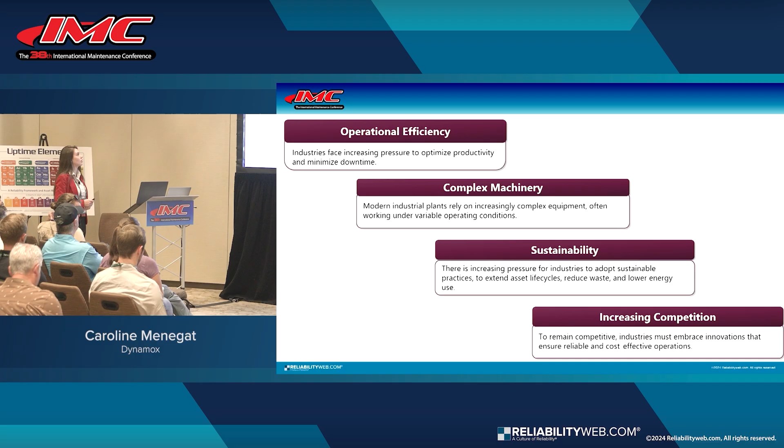At this point, I don't think anyone still has to be convinced about condition monitoring, but just some highlights on why it's such a hot topic these days. Operational efficiency - there is definitely a pressure to increase productivity and reduce downtime. So that's definitely the top reason.

Also, complex machinery. It's normal for me to visit plants where old machines for a specific operation would need 3-4 machines, and now it's all being replaced by one machine that does it all. Of course, it gets more complex - variable speed, variable operation. So that's another thing to highlight here.

Also, sustainability. There is definitely good pressure to actually increase the life cycle of assets, to reduce waste, to have lower energy consumption. So that all adds to the table as well.

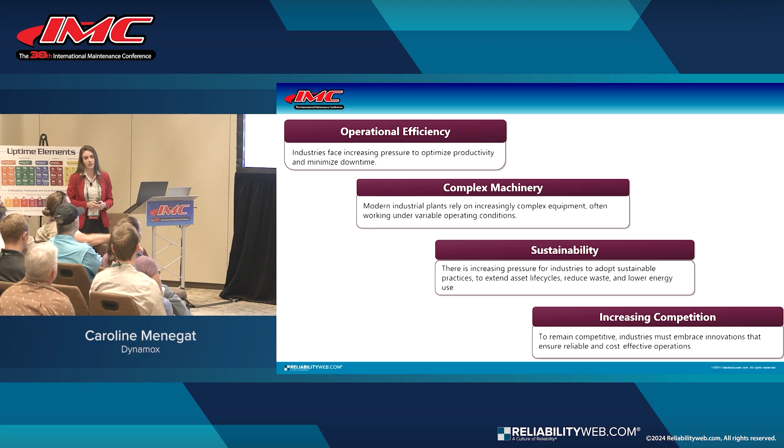And definitely increasing competition - we're seeing this all over, it's full of competitors here, from Dynamox, for example, the company I work for. So everyone is welcome, but it's definitely increased competition in this market. And the industries that don't embrace innovation are definitely going to stay behind. So that's another reason I'd like to highlight here.

And what I mean by condition monitoring - I attended a few other conferences here, a few other sessions, and saw a lot of people talking about vibration. I just would like to highlight that I don't believe it's all vibration. It's definitely one of the most important metrics that can be monitored, but there's a lot more than that.

When we think here, the first part is all about power generation - providing energy for the rotating equipment to work. So we divide it into this, and here we list that it's, again, not all about vibration. There's definitely electrical analysis that can be performed, oil and temperature that can be performed throughout this whole chain. So there are a lot more variables to monitor here, and we'll be covering this a little bit more.

The reason why I put this together is to have a broader spectrum, not to just focus on one single thing. I'm not saying here that we should be monitoring these variables for all the assets we have in an entire plant - that would be very expensive, and we would have so much data that we wouldn't even know what to do with it. But that's why we should prioritize.

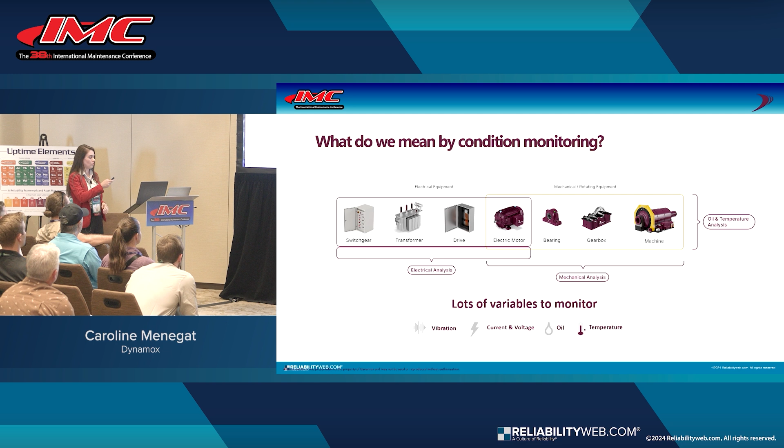We solved the problem in terms of vibration. They even changed the lubrication plan they had based on vibration. But then, so we got rid of that, and the current and voltage of the electrical motors started to be the headache now, because electrically there was no monitoring. So that's why you should really get to the root causes and then decide what to monitor, what to prioritize.

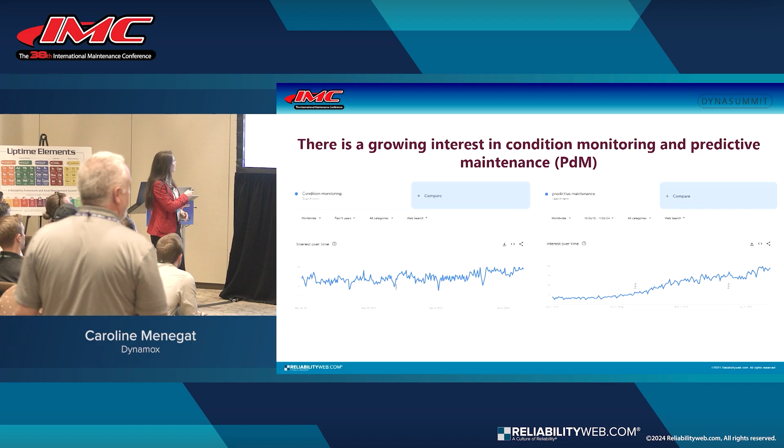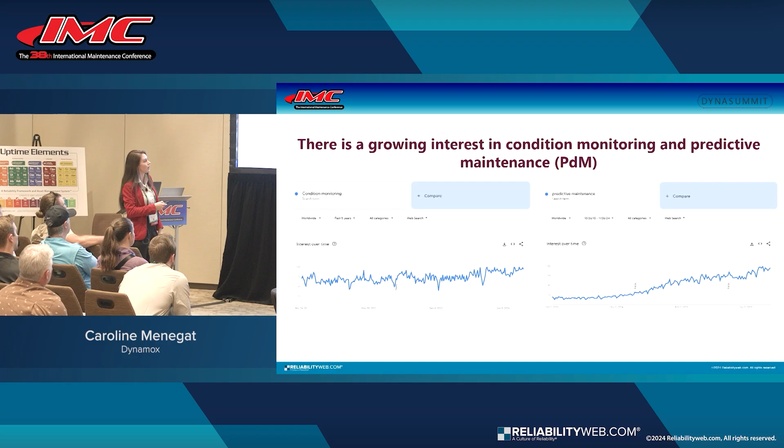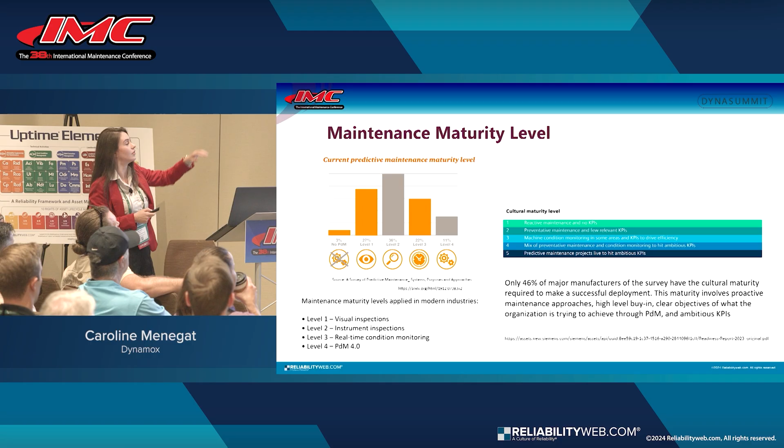But yeah, there is still a long path to go. We've been talking and discussing this, but here there are some other researchers I brought to discuss, and there are a bunch in the market, so this is just one of them. Here is the source, and basically here are the levels. They categorize different companies they searched in levels of maturity. Level 3 means real-time condition monitoring, so they're doing condition monitoring already. And PDM, doing something about it or being predictive, only 11% here. So that's still a long path to go.

Another study here brings the cultural maturity. I'm not even talking about already implementing. I'm talking about being ready to implement or to have a predictive program, where only 46% of the researchers here consider that they have the requirements to successfully implement a predictive program. So that tells us a lot about the long path we still have to go.

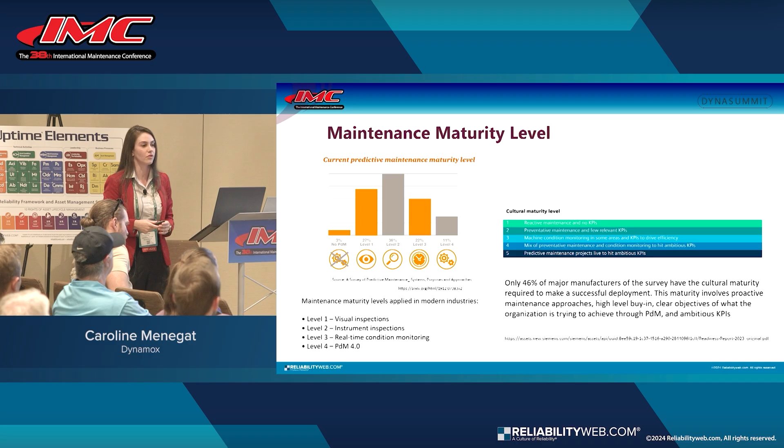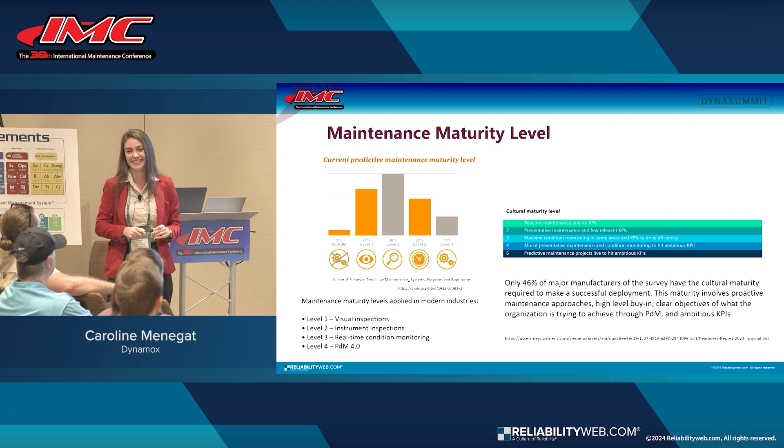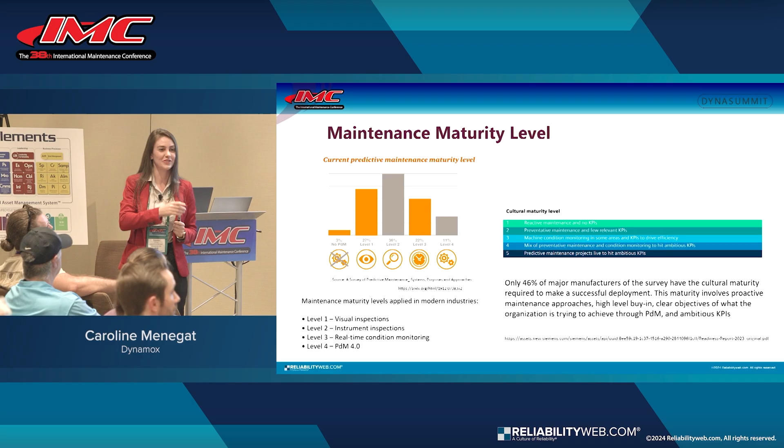I don't know if anyone here would categorize their companies in this level. Anyone care to share if they have a predictive program already in place, successfully implemented? Anyone here? Nobody yet? Nobody's part of this 11%? What about condition monitoring? Are you guys doing some condition monitoring, maybe still structuring the predictive program? Anyone care to share a little bit? I think the microphone. Here you go.

At Hill Air Force Base, we've had a full-blown predictive program that's been widespread since, I want to say 2014. Oh, wow. What's held us back has been manpower. They want us to do everything from oil analysis to ultrasound, and they've now added other locations, and we're down to 3 people. So, oh wow. We're doing our best, but it's there. It's just we can't be everywhere at once.

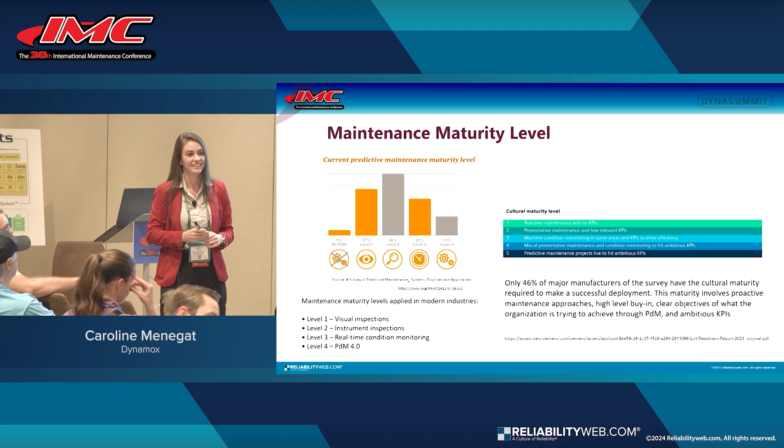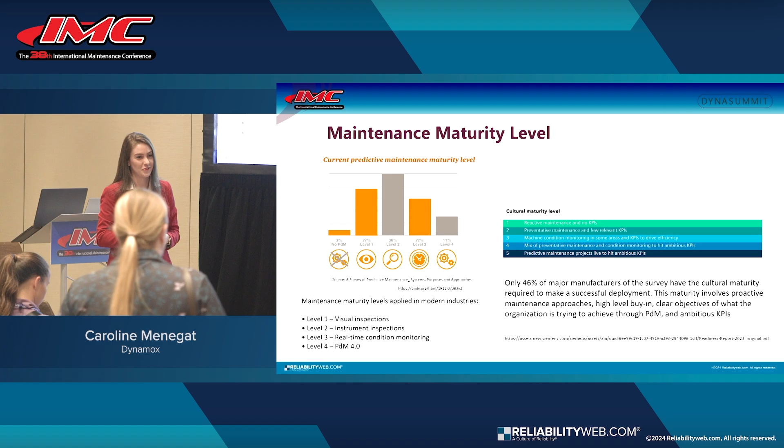Yes, I attended yesterday, I think it was from NICARE, and they were sharing this lack of skilled people. So that's definitely a problem. Everyone is facing the same trouble. I will discuss a little bit how we can help on this, not saying your specific case, I think with 3 people, down to 3 people, there's not much that can be done other than hiring. But there is definitely room to optimize their work. So I'll be discussing this a little bit more.

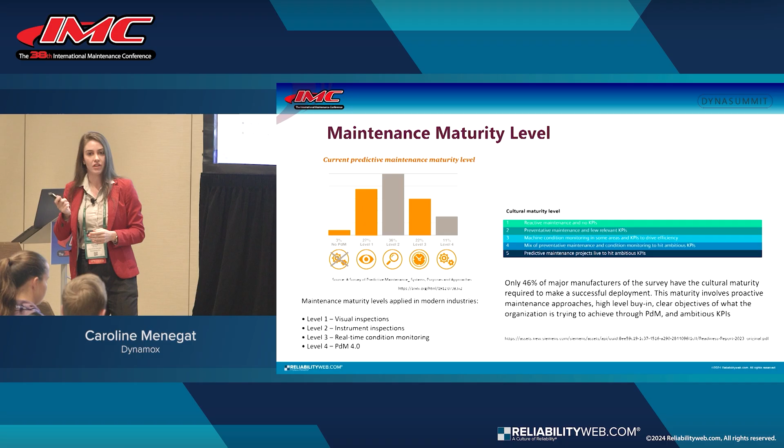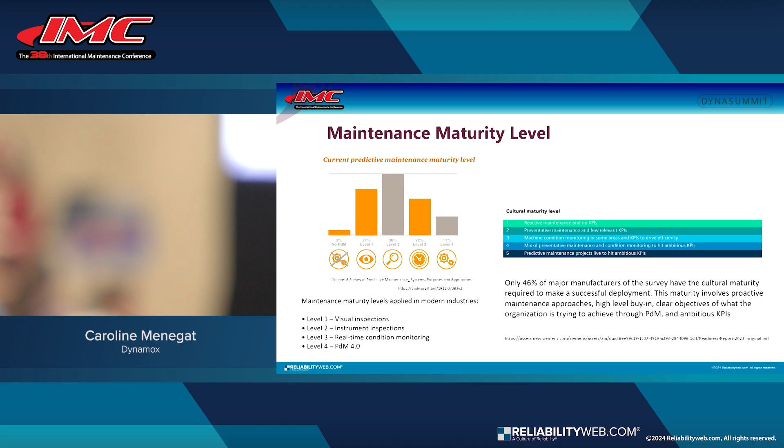Anyone else would like to share their programs or the condition monitoring, what they're doing, if it's been successful or not? No? I'll move forward then. You guys are shy today. Well, guys, let me move forward here.

So I do believe that technology can help on lack of people, help on getting things safer. That's definitely one of the main reasons why technology should be applied. And here, one that I would like to highlight in terms of collecting data, or one of the reasons that we should be moving to continuous condition monitoring, is hard to access or high risk measurement locations.

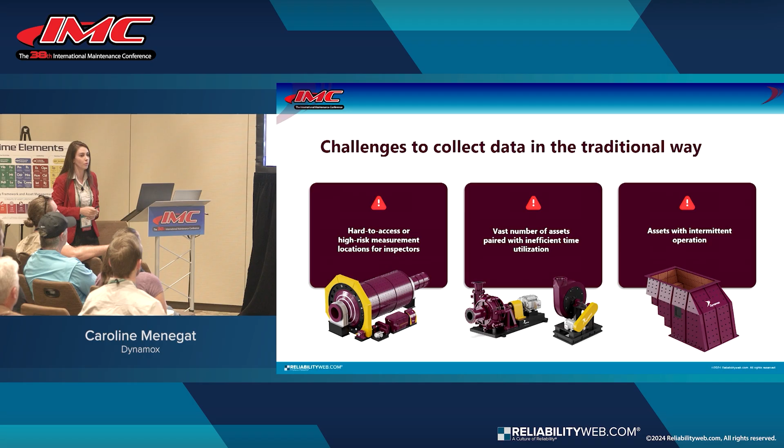So if you can automate this and bring technology to help on this, it would definitely help on the lack of skilled people. And also here, one thing is that if this person is... I'm not gonna be in the fight of wired or wireless.

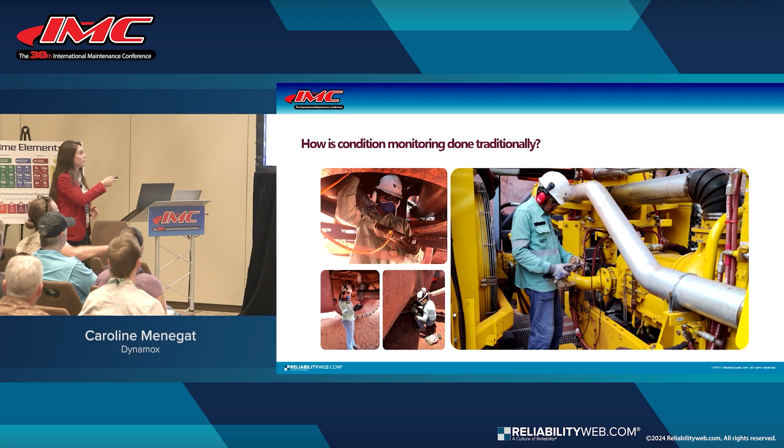To be honest, I don't think we should even be having this discussion because it's just a means. But if the person is spending 70, 80% of her time collecting data and not analyzing it, that's definitely not bringing value to the table. So that's another reason to help.

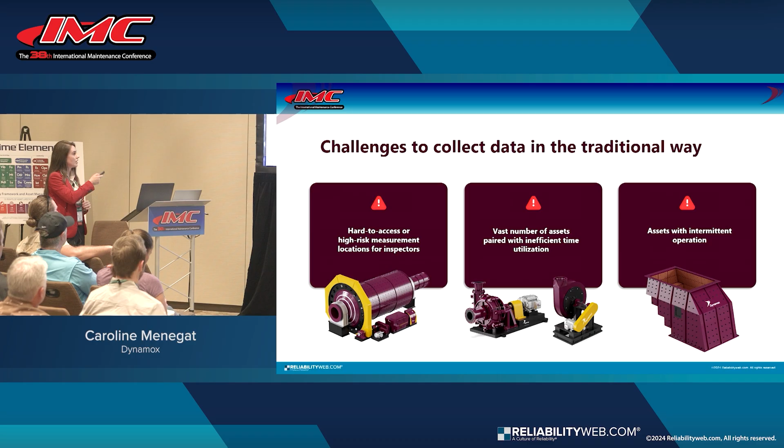And also here, assets with intermittent or variable operation. So there are some events that happen at some point, and then when you go measure it, it's not happening anymore. Having a continuous condition monitor will definitely help on this. And again, it doesn't matter if it's wired or wireless, I don't really care about it. It's just if it's vibration or electrical. But these different operations sometimes need technology to be monitored.

And what else here? Another research that I brought, guys, and again, the links are all here for you to check out. But 5 golden rules to successfully implement predictive maintenance at scale. So they found out that these are the main reasons.

The first one would be to be judicious about which assets to include. We do see a lot of companies starting with pumps or fans, like very easy, or not easy, but they can be very critical, but don't get me wrong, they're not complex assets. So they implement on that, and then when they try to expand, it doesn't work on more complex assets.

Yesterday I was actually watching a session, and the guy next to me said, we started applying vibration sensors in this case, and then when we moved to another plant, we found out it wouldn't work there because of environmental reasons, because the robustness was not present. So I'm not saying it's a bad technology that they chose, I'm just saying you should consider this when choosing, and not go for the easy wins, let's say.

And also, I put it here that the key, I think, is to balance a little bit. We're seeing companies starting with the most complex assets they have. I don't think that's the way either. You gotta have a manageable scope, but with assets that can actually show value when you predict failure. So that's one of the things.

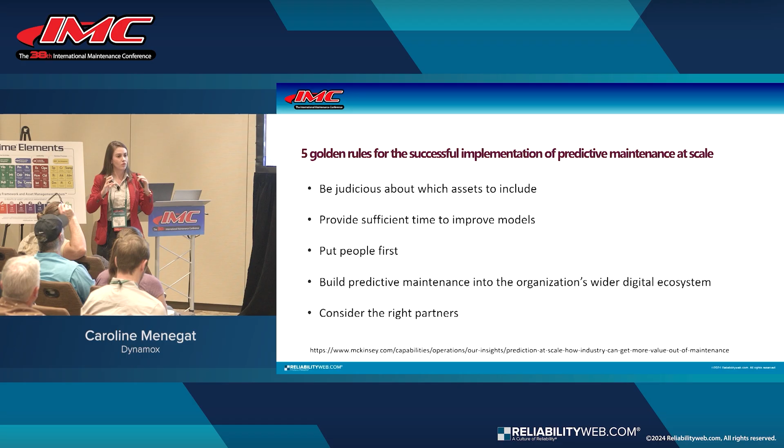Another one listed in this research is build predictive maintenance into the organization's digital ecosystem. So it's very common for us to see a fight between the IT team and the maintenance team. The IT team doesn't understand that the maintenance team is a client of theirs and should be helped. And the maintenance team doesn't understand, for example, data security or this kind of thing. So it's always a fight, and usually they don't work together. So we don't think that this predictive maintenance program should be isolated or should be one side or the other. It has to be all together.

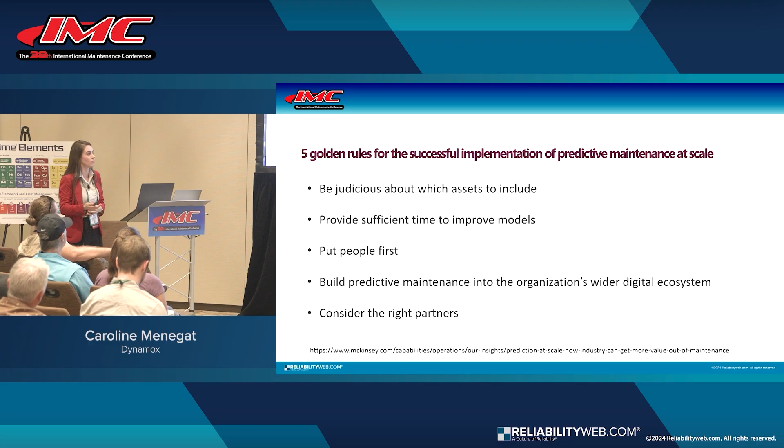And the last one, and I don't want to be commercial here, guys, but consider the right partners. So if you choose a partner or vendor that only sells you technology, I don't think that's the right way to go, okay? Again, not trying to be commercial, but we believe and we've seen that the most successful implementations are when a partner brings expertise and guidance to what you're trying to implement. So that's another thing to consider here.

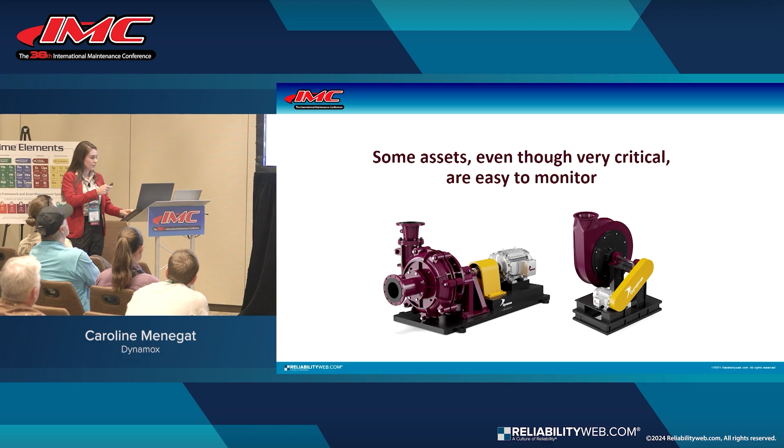And here lies a question about how to monitor entire plants. So if you're not just focusing on fans and pumps, which are easy, how do you monitor entire plants when we're talking, for example, about a mining example. I didn't know, as this is my first IMC, who actually attends, and I didn't see a lot of people from the mining sector, but you can think of this as any other sector, any other plant.

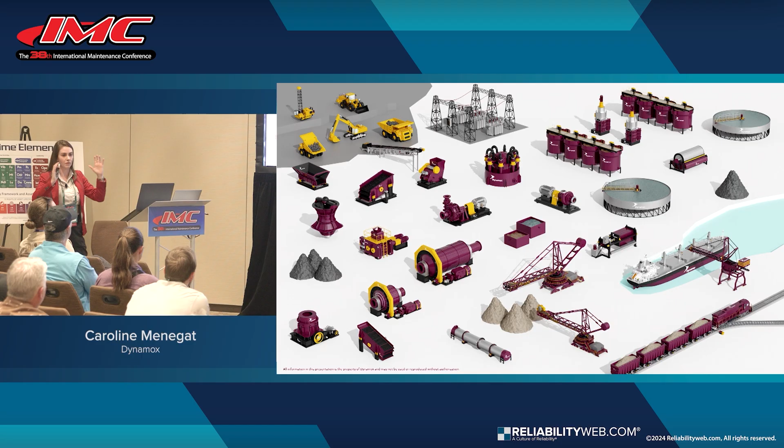What I want to highlight is that here are the fans and the pumps - this is easy. But when we start from the beginning, the extraction of the ore, and then we get vibrating screens to process the material, or even power generation before that, it becomes a bit more complex. I'm sure in your companies you have the same idea, maybe not mining, but you know which assets are more complex in your environment.

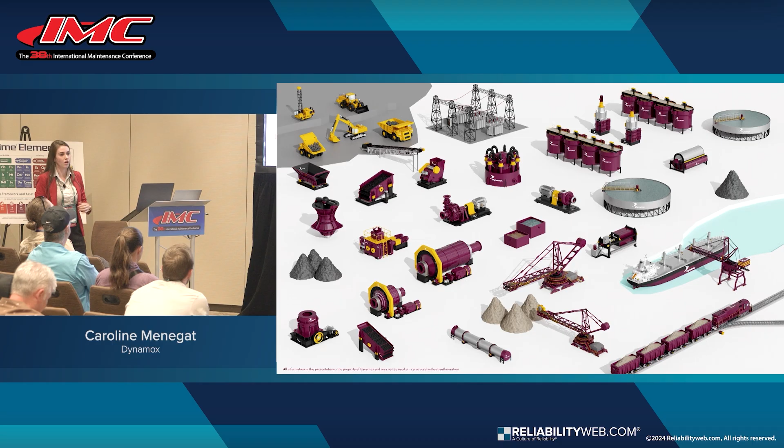Here's another one, for example, a bucket wheel reclaimer. This is very difficult to monitor as well, all the way until you ship the product. So all of this is what I mean by entire plants - all of this should be considered in the program, in a predictive program. Not just the easy ones that everyone can do. When it comes to these more complex assets, usually they have variable speed, usually intermittent operation.

And they require expertise - it's not just about putting sensors. Never mind if it's vibration, electrical, or whatever, but we definitely have to have some expertise. So the question would be, how do we monitor this? Unfortunately, I don't think there is an easy answer. I don't think there is a recipe.

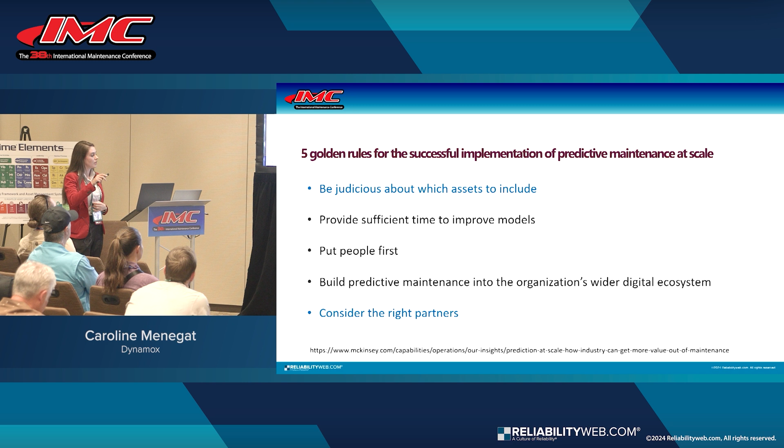But from the last 10 years of experience, we've been seeing this - there are two of the 5 golden rules that stand out the most. The first one would be this: be a little bit more judicious about what you choose to implement. Don't run away from the most complex assets - they can have the best benefits or the best results, so you should actually look for them and implement on those ones.

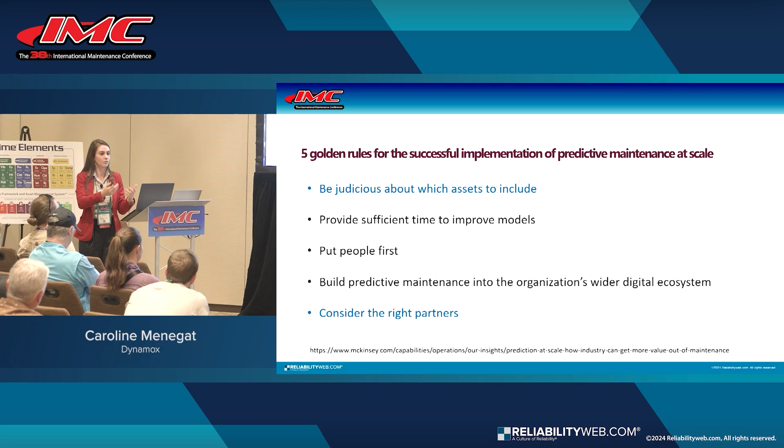I saw some talks about wired and wireless sensors, but I don't think that's what should be discussed. That brings me to consider choosing the right partners. I don't want to be commercial, but you've got to choose a vendor or a company that works together with you in your core business, producing whatever you're producing, while also helping you improve reliability. That's what I'm going to show you a bit more.

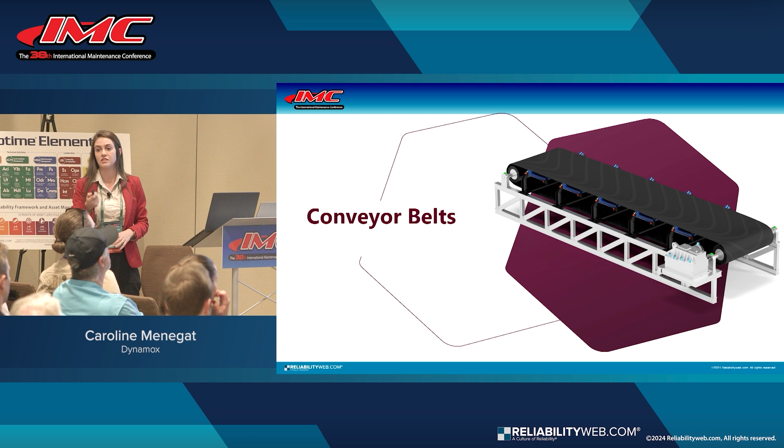Here are some use cases I wanted to highlight. Sorry if the examples are a little too inclined to one sector or another, but I'll take a conveyor belt - I think a lot of different sectors can have conveyor belts. So here, if we were choosing the easy parts, it would be the motor, the gearbox, and maybe the pulleys.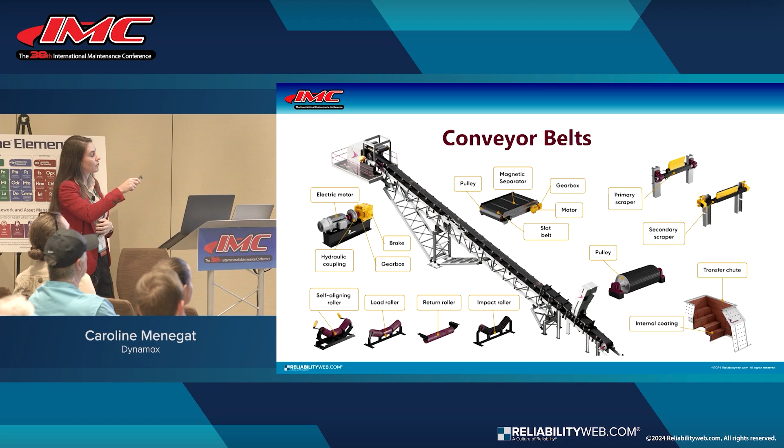With this mining sector client, we mapped everything that was giving them headaches - that's how we worked together. We listed all the different parts that could present problems. There won't be enough time to show everything here, but we're monitoring the motor electrically, monitoring vibration and oil, and integrating data to monitor the gearbox. But here I focused a bit on the more complex components of this machine.

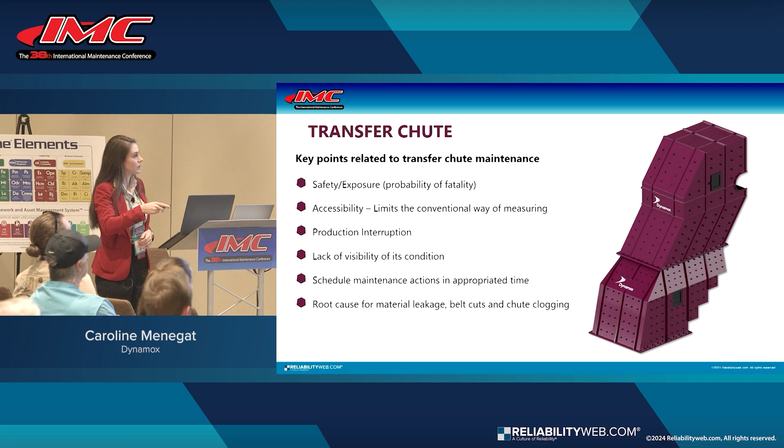One of them would be the transfer chute. For those not familiar, this is when you want to transfer material from one conveyor belt to another - you basically have a transfer chute. It's really difficult to monitor because it's not even rotating. So how do you do that?

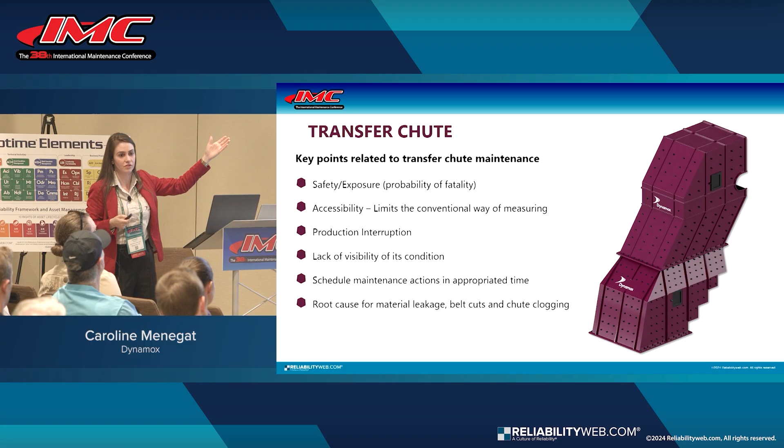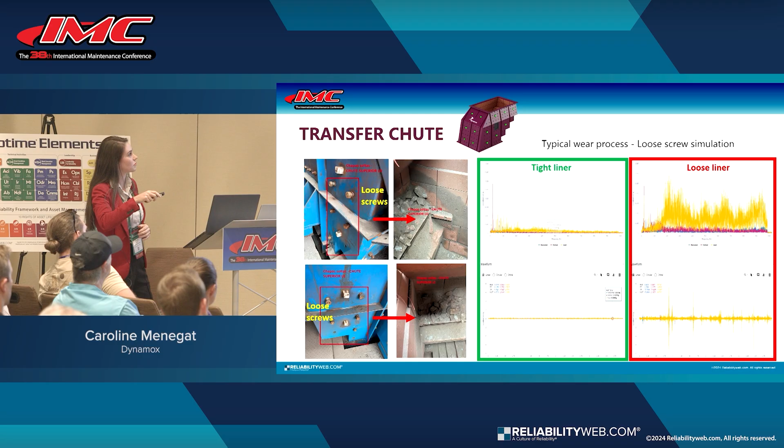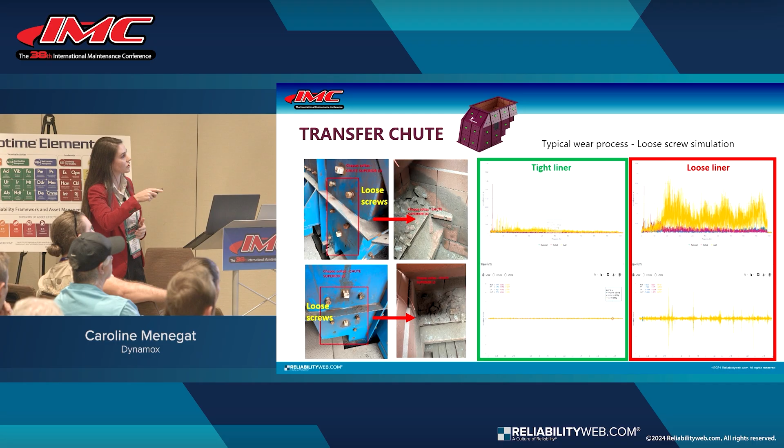In this case, we installed sensors on the surface, on the sides of the transfer chute, across a bunch of transfer chutes, and we were basically gathering as much data as possible. We found out that over time, these plates would get worn out, so we could compare a new one, or one that's working just fine, versus one that is worn out.

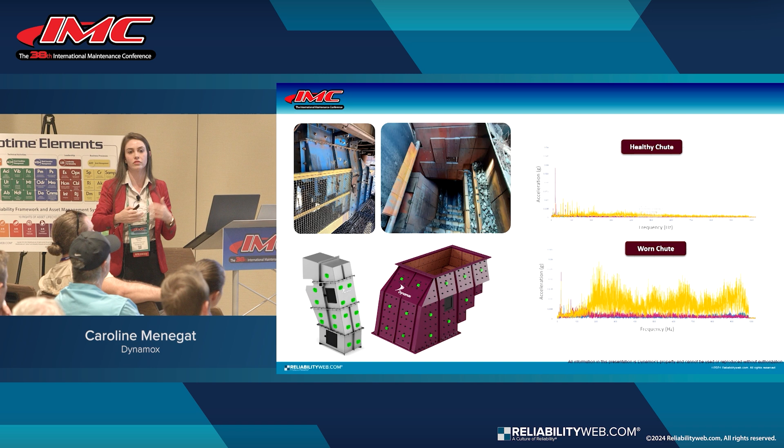I think it shows better. So this is the difference - we could monitor this and get to this result. Again, we're selling a solution and not just sensors, so we're working together on more complex assets.

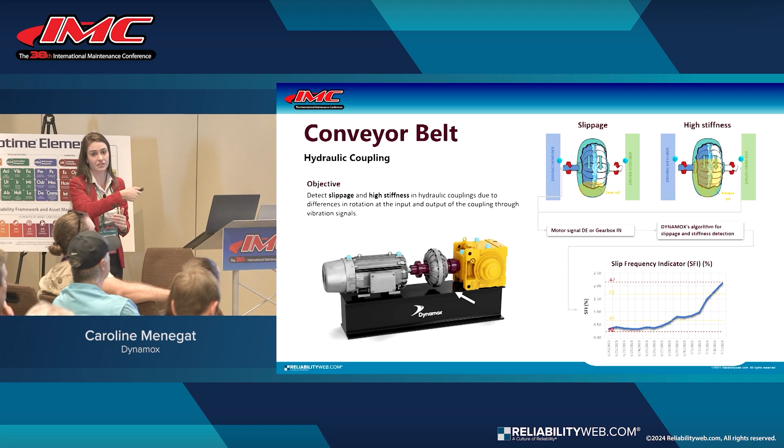Here's another one, the coupling. The coupling can present slippage or high stiffness. We installed sensors on this, compared the data, and got a very good model. We improved this model over time, because you have to give time to things. We got an accuracy of 95% in terms of slippage, so we can definitely monitor this now. This was a big problem for them.

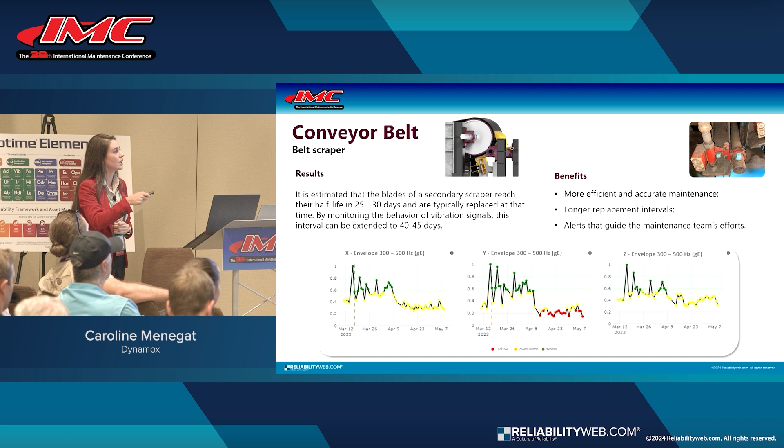And another one here, belt scrapers. I don't know if you're familiar, but it basically cleans the belt - it scrapes the belt. You can see the lifetime here was 25 to 30 days. These blades get too thin or get damaged. We improved that to 40 to 45 days, more or less, the lifetime. So that's another project we worked on together, again trying to not just sell sensors but present a full solution.

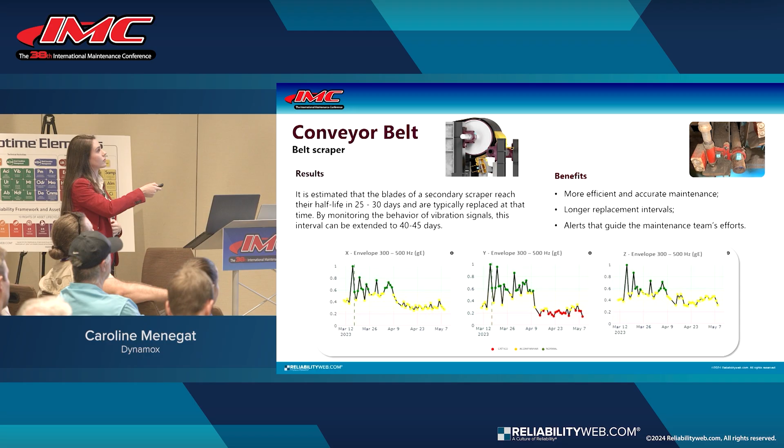Another one, and again sorry for maybe being too inclined to mining, but vibrating screens. I won't go into a lot of details, but this could also be applied to vibrating screens that are not in the mining sector. This one, for example, is for agribusiness, so we can definitely monitor that as well. What we're trying to do here is, again, not just the basics like monitoring the motor and the exciters - that won't be that difficult.

It is difficult for vibrating screens because the machines vibrate a lot, so you need a very robust system. If you put a wired one, that will definitely damage the cables very easily. So in this case we put the sensors, again, in the motor and the exciters, but we mainly focus on monitoring the performance. That's when we stop just monitoring the condition and talking to the maintenance team, and become appealing to the operation or to managers at a high scale.

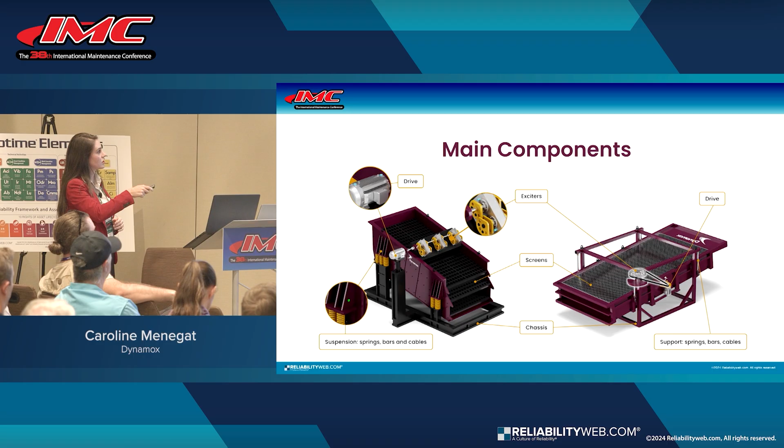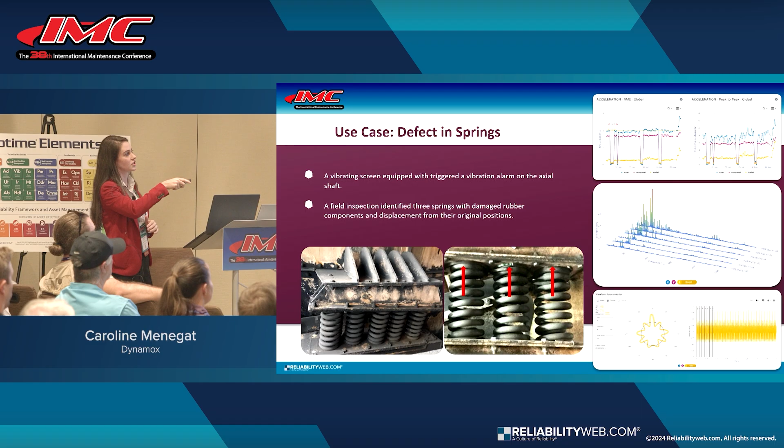So basically we put sensors on the springs and we monitor - the sensors go around here. These are some cases of success. We can identify problems in the springs, for example, because that will change how the vibrating screen is moving. If it's supposed to make a circular movement and it's now performing linear, going up and down, you can know something is wrong, or if the amplitudes are different, you can know as well.

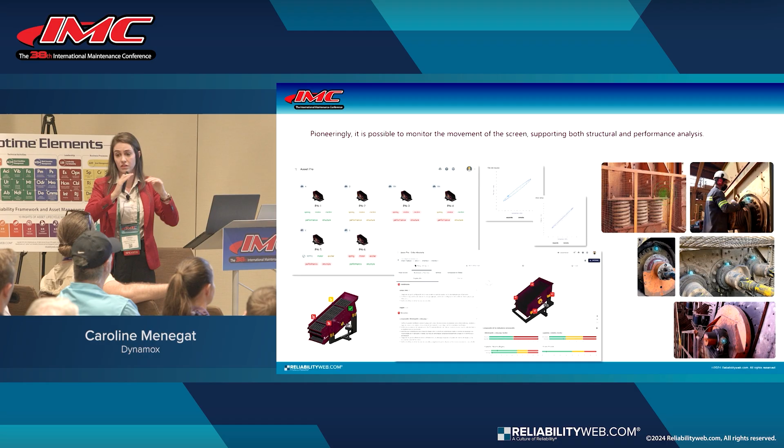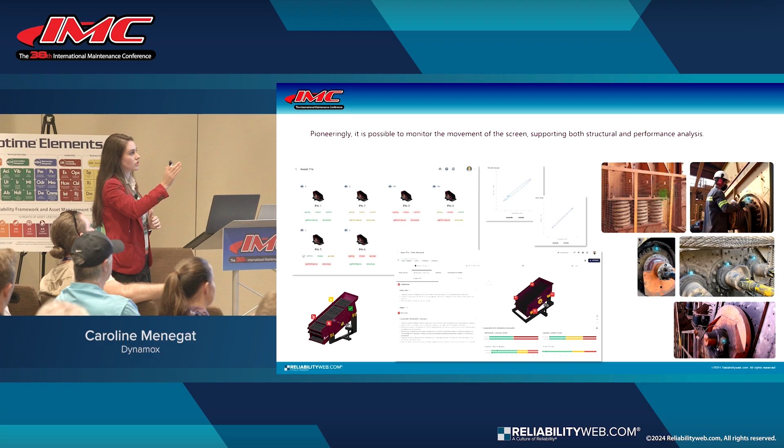So we created a whole solution for evaluating, again, not just the motors and exciters, but the structure. If the vibrating screen is vibrating like this, the left side for example is not absorbing vibration as it should, it will definitely have a crack on the structure. So that's one thing, and another thing is performance - it doesn't matter that you're not having a structural problem, if you're not performing, that's not good either. So that's another thing we created with this client, and we are monitoring and giving proactive actions or recommendations of what could be done.

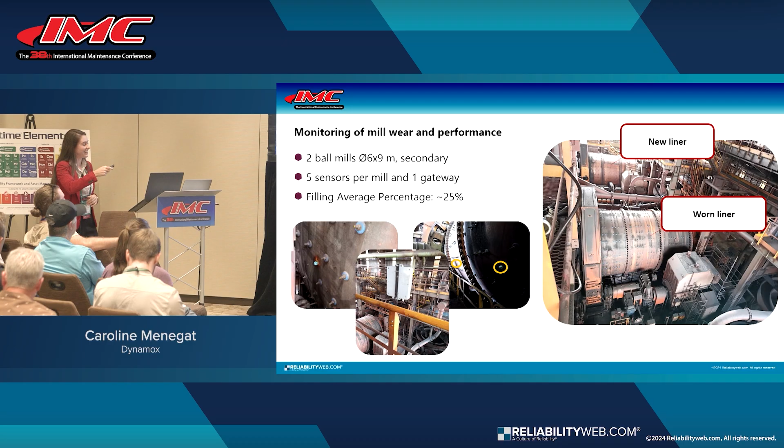So that's another example, and mills as well. Here we are monitoring the motors in terms of electrical problems. We did find very good results, but we wanted another challenge, and here we can see two mills - this one is brand new, and this one is actually worn out already. We can even see that it's older.

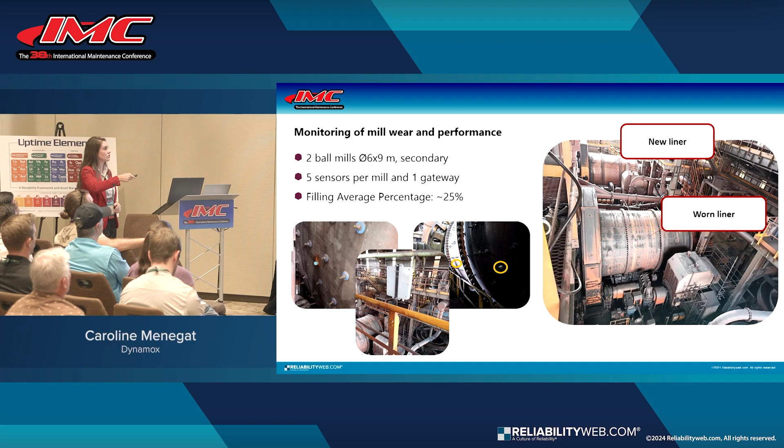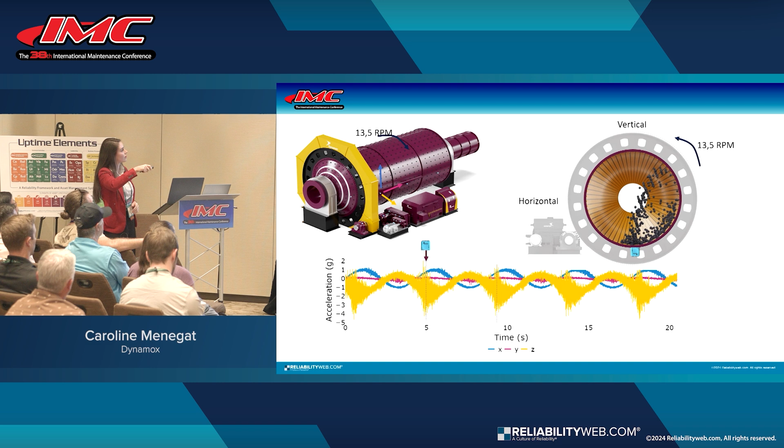So what we did - they wanted to see if the body of this mill was getting thinner inside, which would cause it to lose performance. So we installed sensors on the surface of this machine, on the body, and we could see patterns in terms of vibration from the different sensors installed along the body. Let me zoom in - here I think this one is more clear. Yeah, here we could see the difference between when it was new and when it was old. Nobody does that - everybody just wants to stick sensors on or monitor the motor and the gearbox, and that's it. Nobody goes to a deeper analysis.

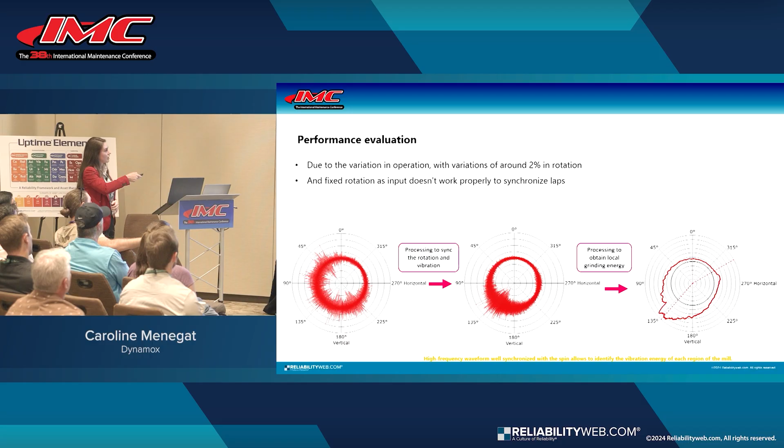So that's what we are trying to say here, that you should be looking for someone who can actually work together with you, bringing expertise. So that's the main thing here. And again, monitoring performance. There's a lot more.

These are thickeners. This is why I don't say that we should be fighting wireless versus wired. In this case, the two types of sensors need to be used. You cannot just monitor thickeners with wireless sensors. That's not possible. We tried. You gotta have a mix. So that's one thing to consider.

These are laminators or flaking mills. These are locomotives. So we can also monitor all this working together.

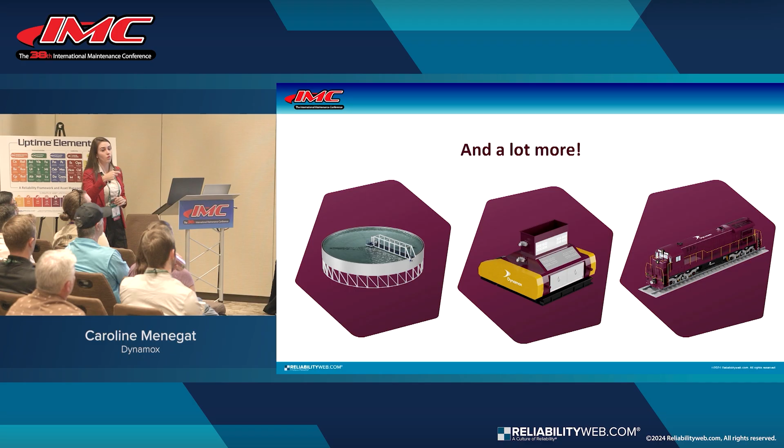And to finish here, hopefully what we achieve based on this, what we get more is changing the mindset - not seeing maintenance as just an expense, just a cost, but seeing maintenance as a strategic investment. So that's the main thing here: providing solutions that work together and bring results. And that's, of course, pointing it out in terms of cost as well, in terms of savings. So that's what I wanted to share with you guys - a little bit what we've been doing and a little bit what we believe is the right way to go in terms of maintenance and predictive implementation.